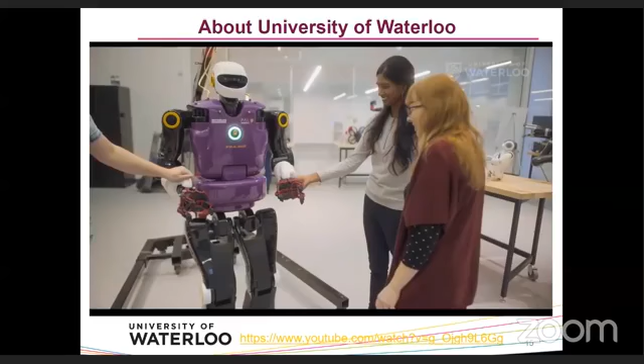She won the Nobel Prize just now. And he is Vice Chancellor of University of Waterloo.

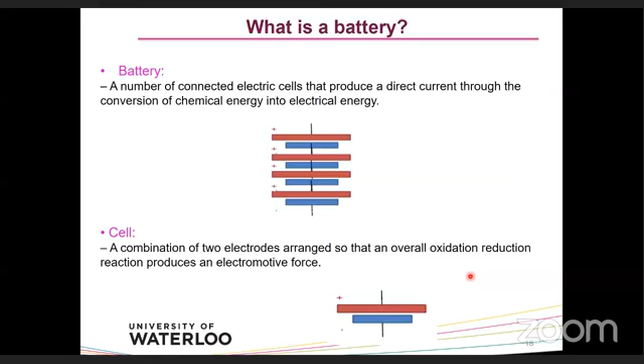Now, let me jump to my technical topic about the battery. What is a battery? We all know that a battery is actually a number of electrical cells connected either in series or in parallel. And the cell is a combination of 2 electrodes arranged so that an oxidation reduction reaction takes place, which produces electromotive force. Now, there are 3 types of battery: primary, secondary, and reserve.

So a primary battery is one which is not rechargeable. So once you are done, you have to throw that battery into the garbage. The best example is the Duracell or alkaline battery, zinc carbon, zinc air, or lithium metal. Another type of battery is known as the secondary cell or battery, which is the rechargeable battery. It means you can charge and discharge a number of times. And the best example is our 12-volt battery, with which you can start your car. Then the lithium-ion, nickel cadmium, and nickel metal hydride batteries.

Now, cell, module, and pack. So cell is the smallest element in the pack, which you can see over here, and the voltage range is between 1 to 6 volt. Module is something like this one, where a number of these single cells are connected either in series or in parallel. And pack, you can see over here, a number of modules, let's say 1, 2, 3, 4, are connected in series or in parallel, depending on your voltage and current requirement.

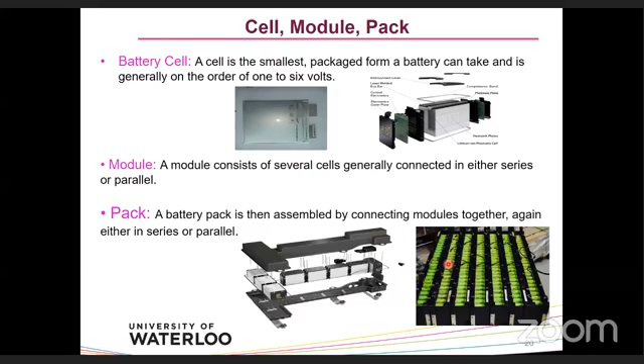And this is the Tesla battery pack, which uses the cylindrical battery, like the Tesla Model 3 and Model X also.

Common units we all know are voltage, current, and capacity in amp hours, which is equivalent to the coulomb. Now the new terminology is SOC, known as the state of charge, the measure of charge remaining in a battery relative to its full or empty state. And DOD, known as the depth of discharge, is opposite to the SOC. So let's say your battery is 60% SOC, then you can say the DOD is 40%. Another example: SOC is how much petrol is there in the tank, and depth of discharge is how much petrol is removed from the tank.

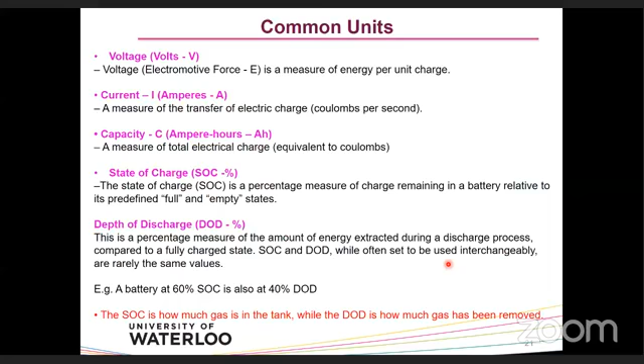In continuation to that, C rate and E rate. The charge and discharge current is measured in the C rate. So if you look at 1C, and your capacity is 100 amp hour, you can say the 100 ampere constant current discharge in 1 hour is known as the 1C rate. Opposite to C rate, it is known as the E rate. Power, we know, is V into I; watt-hour per liter is energy density, watt-hour per kg is specific energy, then specific power and power density.

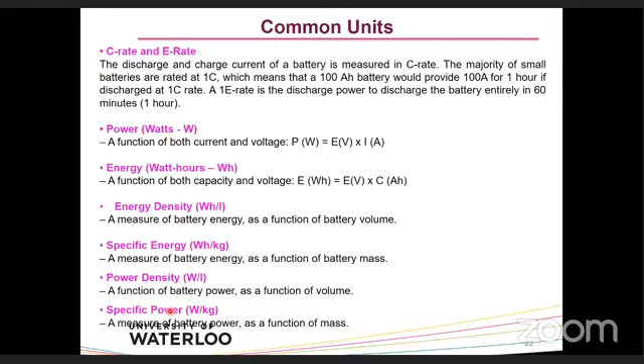State of health is the new term; it is the measure of battery condition compared to its initial or ideal state, and it is the measure between beginning of life and end of life as a percentage. Those who are in electrical must know about the OCV, known as the open circuit voltage, which is the voltage when there is no current passing through the circuit, and subsequently there is no chemical reaction occurring within the battery.

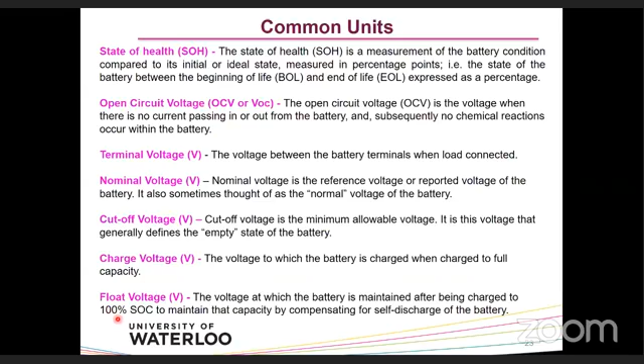Now, terminal voltage is the voltage measured between the positive and negative electrodes of the battery when the load is connected. Nominal voltage is the reported voltage, reference voltage, or manufacturer supplied voltage, and the cutoff voltage is the minimum voltage which defines the empty state of the battery. Charge voltage is the voltage at which the battery is fully charged, and float voltage is the voltage at which the battery is maintained after reaching 100% state of charge. So this is the end of the terminology part, and now the lithium-ion battery.

Then, types of batteries: as we all know, coin batteries are used for wristwatches and small devices. Cylindrical batteries are used in electric vehicles, and prismatic as well as pouch batteries are also used in electric vehicles nowadays.

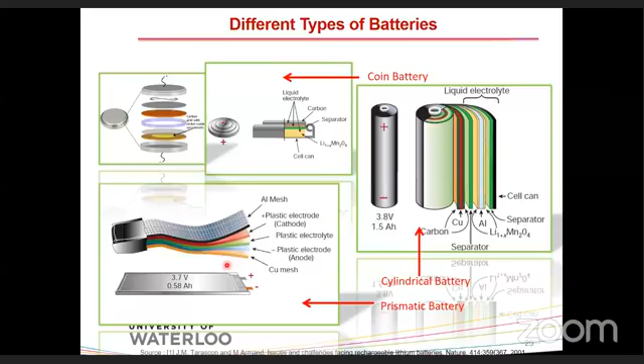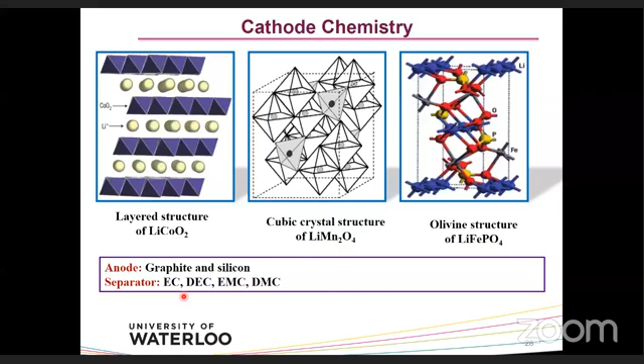The separator materials are ethylene carbonate, diethyl carbonate, ethyl methyl, and dimethyl carbonate. So after this, I would like to play a small video about the manufacturing process for the lithium-ion battery, which has the anode, cathode, and separator, and how they manufacture the battery with the LG Chem stuff.

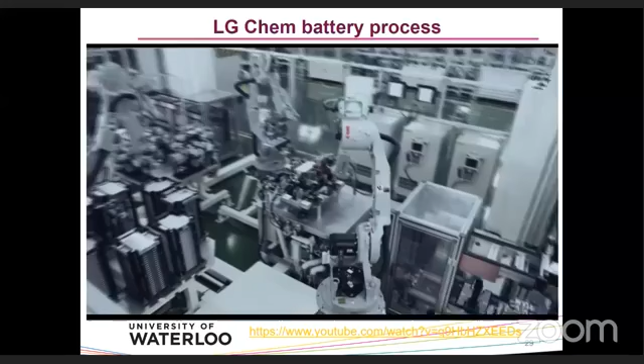So just for your kind information, the 5 dominant electric vehicle battery manufacturing companies are: one is LG, second one is Samsung, third one is Panasonic, fourth one is a very good Chinese company known as CATL, Contemporary Amperex Technology Limited, and then Bosch. So Bosch has recently launched so many batteries, and even Tesla batteries are also available in the market now.

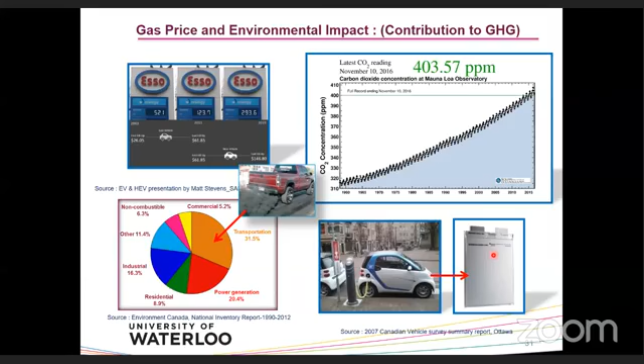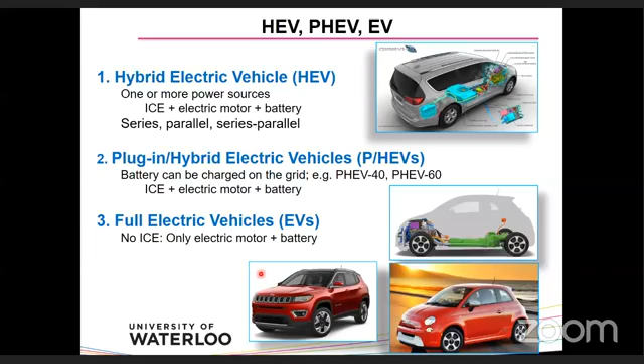And a full electric vehicle is one in which there is no engine. It works only with the battery and the electric motor. This is the Jeep Compass, and for your kind information, Jeep Compass is launching an electric version in 2023. So this is something about hybrid, plug-in hybrid, and electric vehicle.

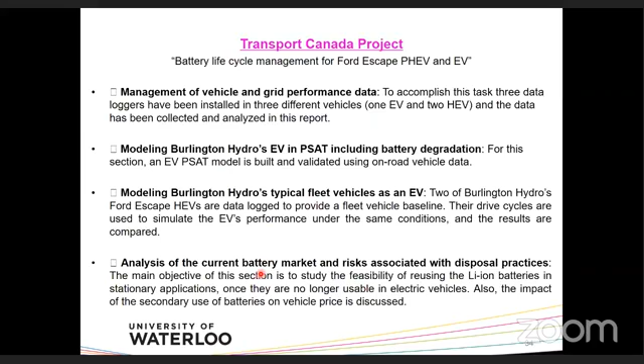Then the Transport Canada project. I don't want to go into all these paragraphs, but just to give you a small idea about the project. The title was Battery Life Cycle Management for plug-in hybrid and electric vehicle. And there were 4 tasks: one is data management, second was modeling, third model validation, and fourth the secondary use of battery.

To give you an idea about that project or that vehicle, it was the first Canadian electric vehicle, which you can see over here on the right hand side. So zero emission, pure electric vehicle. The company called REV, Rapid Electric Vehicle, that is in Vancouver, took out the engine from this Ford car and then put in the battery pack and the electric motor.

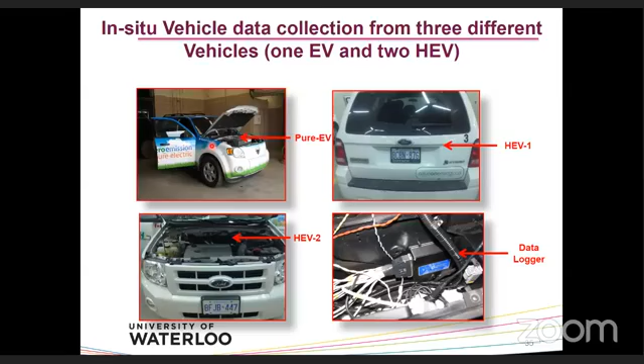So it's a pure EV, and the other 2 are hybrid electric vehicles, where you can see the engine plus battery pack. So I took 3 vehicles, and then you can see this data logger. This data logger was installed in this electric vehicle, and then we received the data.

But before going into that data logger, I would like to give a small idea about this pure electric vehicle, where you can see it has the UQM motor that is 125 kilowatt capacity. Then we changed the charging port also, the new charging port with level 2. Chargers are available with level 1, 2, and 3. And usually we use the level 2 charger, which takes around 4 hours to charge the vehicle.

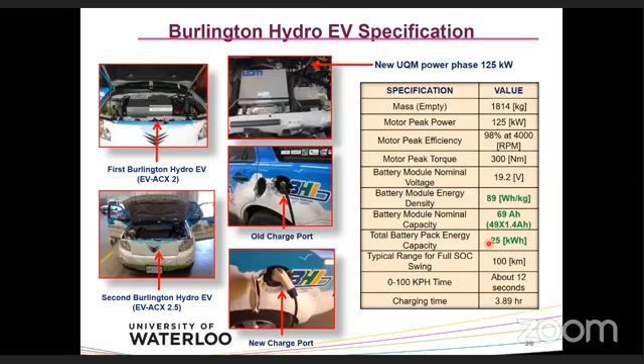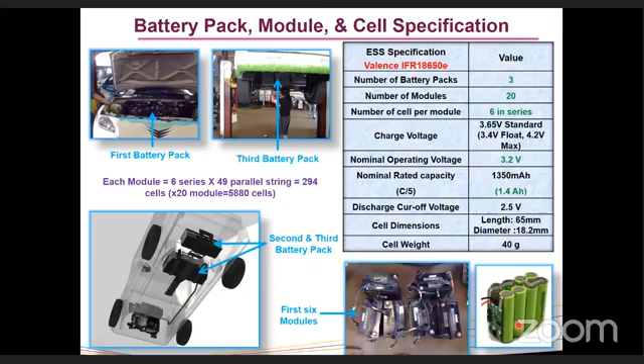Now, let me go to mathematics. Each module contains 6 series multiplied by 49 parallel, which gives around 294, multiplied by 20 modules. So all together, 3 battery packs have 20 modules, which gives around 5,800 cylindrical cells. The battery pack has 3 packs with number of modules 20. Nominal operating voltage is 3.2, and capacity of this cell is only 1.4 because it is a cylindrical cell. So this is about the electric vehicle.

And then this kind of ISAAC data logger was installed in this electric vehicle, which you can see over here below the passenger seat. And then the laptop was connected to collect the data during the driving. Here somewhere you can see the 12-volt shutdown wire, and then the GPS, the global positioning system, for the data collection during the driving and during the charging also.

Couple of important signals for electric vehicle modeling are battery voltage, current, all 20 module temperatures, state of charge, motor torque, motor speed, brake pedal position, and vehicle speed.

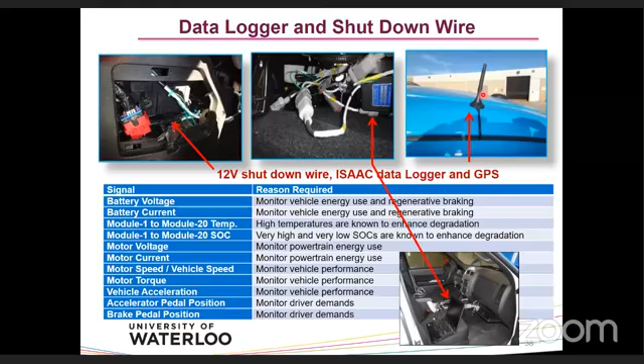After installing the data logger, I drove this electric vehicle from Toronto, meaning Greater Toronto, to Niagara Falls, and then back from Niagara Falls to Toronto on the highway called QEW, Queen Elizabeth Way. This is one of the busiest highways in Canada because it connects to Buffalo, meaning the US border.

When I started the trip, all 3 battery packs were fully charged with state of charge at 100%. When I ended my trip to Niagara Falls, the total trip distance was 106 kilometers, from Toronto to Niagara Falls. At the end of my trip, the SOC was 2%. Total energy consumption, since all 3 battery packs together have 25 kilowatt hours, was 23 kilowatt hours.

Trip cost was calculated at 11 cents per kilowatt hour, which is the electricity cost in Ontario province, Toronto, Canada. So to drive the 106 kilometers, the cost is only $2.60 — it takes only about $3 to reach Niagara Falls. If you go with a gasoline car, it takes almost $25 in gas. So I wanted to conclude that the electric vehicle is much more affordable in operation compared to gasoline vehicles.

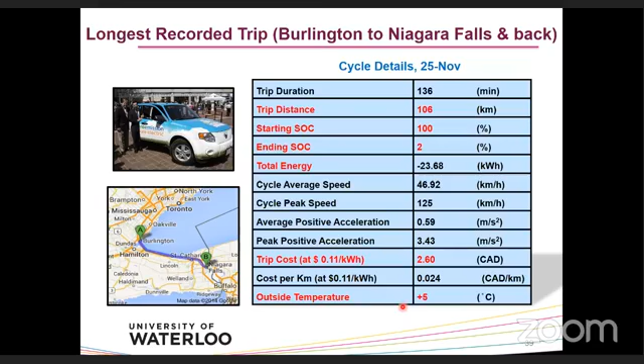Just for your information, when I drove the vehicle in November, the outside temperature in Canada was plus 5 degrees centigrade. This kind of energy and cost analysis was done for this vehicle in terms of total kilometers driven, time, driving energy, charging energy, energy path, and temperature, and monthly reports were generated, available on the Transport Canada website.

So this is about the drive cycle details. And after that...

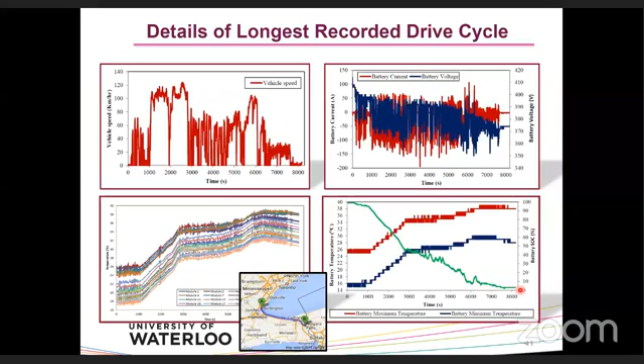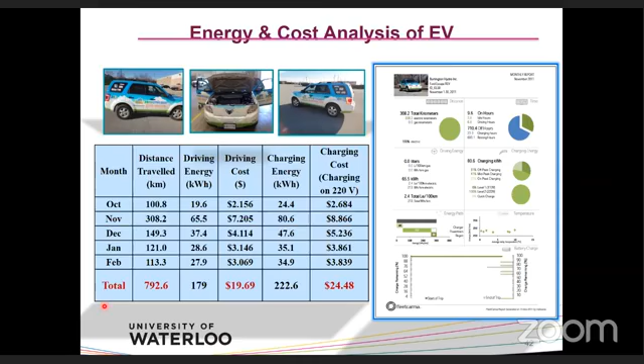The vehicle was driven on the same path between October and February, and it was found that it was driven for almost 800 kilometers over 5 months, with driving cost of only $20 to drive those 800 kilometers. A comparison was then done with two other hybrid electric vehicles, and it was found that this vehicle is much more affordable in operation compared to the other two fleet vehicles, which had the same mass, dimensions, and everything.

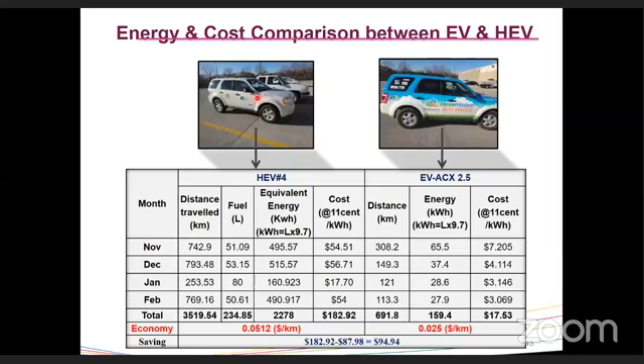This is the end of the second part. So the first part is the data logger installation, the second part is data management, and the third, very critical and important part, is model development.

A model for the electric car was developed using PSAT, the Powertrain System Analysis Toolkit software, whose latest version is known as Autonomie software. This electric vehicle was designed, and you can see the architecture where the important components are the battery, motor, torque coupling, differential, wheel, vehicle, DC-DC converter, and electrical accessories.

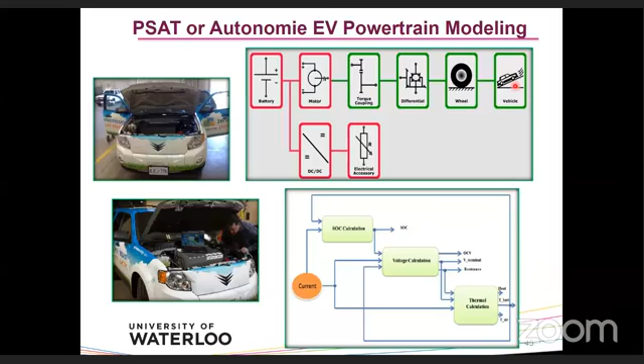Just for your information, when designing a vehicle, let's say in Baroda where we have flyovers, the maximum angle we take is around 7 to 8 degrees. But when I design a vehicle for the North American region, including Canada and America, we go up to 10 to 11 degrees — that is called the gradability.

After that, the first model was the electric model, but the second was a much more complicated model known as the PHEV model, because it has the starter, engine, clutch, gearbox, final drive, wheel, chassis (meaning the gradability), battery, motor, DC-DC converter, and some electrical accessories also.

So when you design or model any vehicle, you have to consider all these major components.

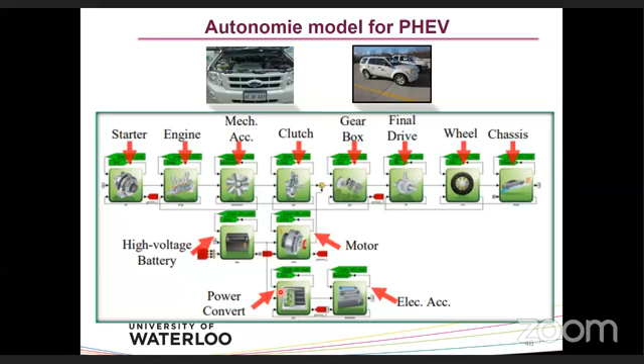This is a Simulink diagram, or MATLAB simulation, where you can see the driver. So the input is the drive cycle or the driver habit, and based on that, the powertrain or driveline or the controller will give a signal to the motor, and based on the motor power, the battery will deliver the required power to the motor. So all these three components, the motor, DC-DC converter, and the battery pack, are connected on the same driveline.

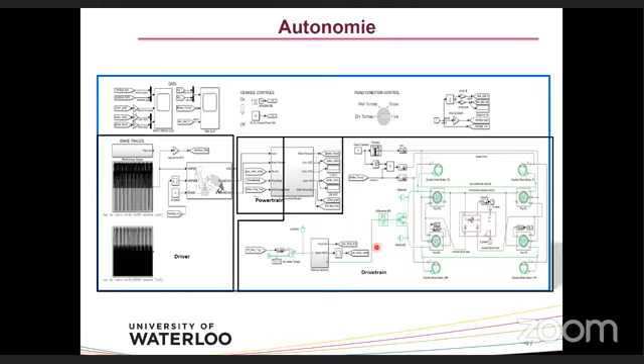I don't want to go into that much detail, but just to give you a small idea, to develop the model you need almost 300 to 350 parameters. Some of the important parameters are for the energy storage system, or battery: number of cells, number of packs, cell nominal voltage, minimum voltage, maximum voltage, mass of each battery, number of cells in series, number of cells in parallel connection, and all other important parameters for the battery.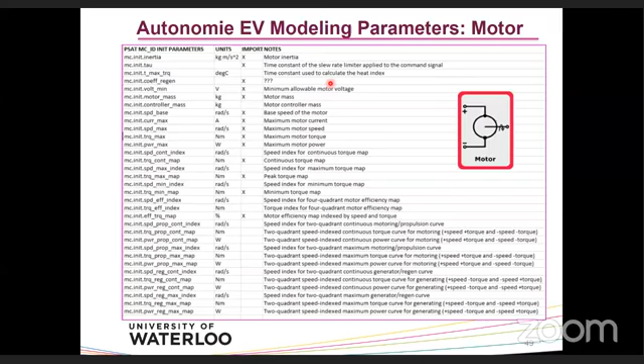In continuation of that, for PHEV we need the engine model, and for that we need the engine mass, fuel tank mass, and everything. For the gearbox you need the number of gears, like the number of teeth on the sun gear, ring gear, and all other parameters.

Again, torque converter, DC-DC converter, wheel, so number of wheels. When you design, I designed this vehicle for 4-wheel drive, but you can design or model for front wheel drive, rear wheel drive, all-wheel drive, or AWD also. Then you consider the vehicle mass, I considered the vehicle mass plus 5 passengers.

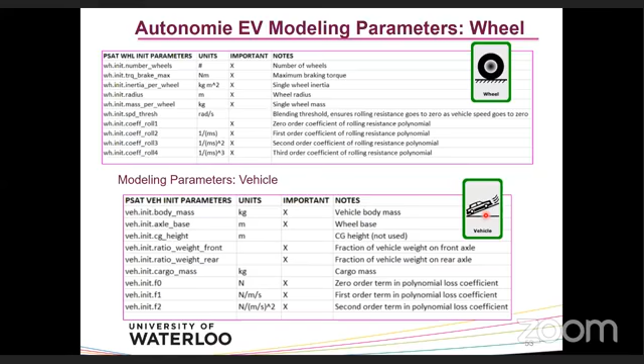So driver plus 4 passengers. Then you have to consider the gradability, CG height, cargo mass, and everything for this vehicle. Brake and final drive, and then finally the controller. So you can see how many parameters are required if you would like to develop the PHEV or EV model. This was the third part, known as the model development.

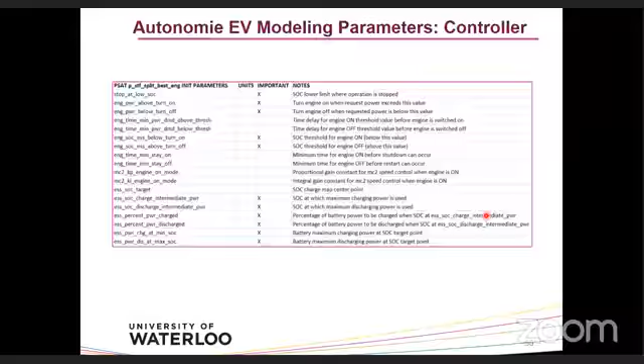I would like to highlight here that when I developed my initial model, I did not consider the regenerative braking system. Later on I refined my model, and my model captured the regenerative braking system also. So that is one of the important parts if you develop any model.

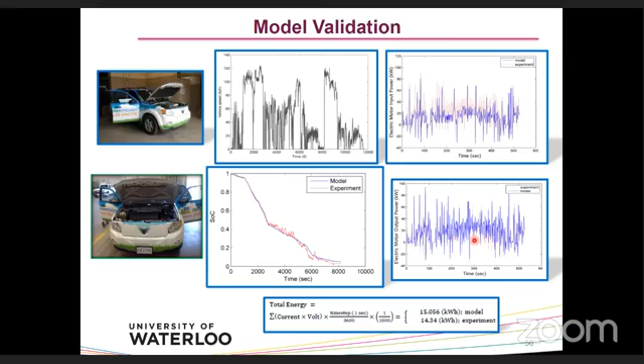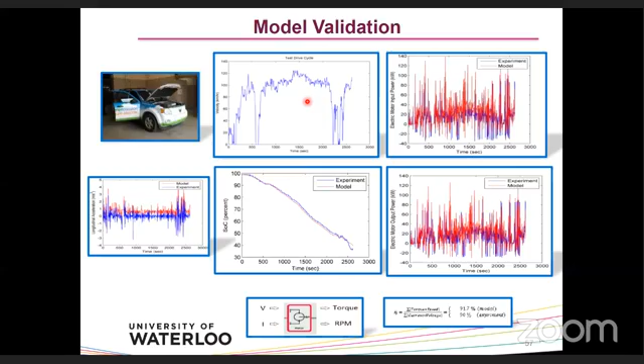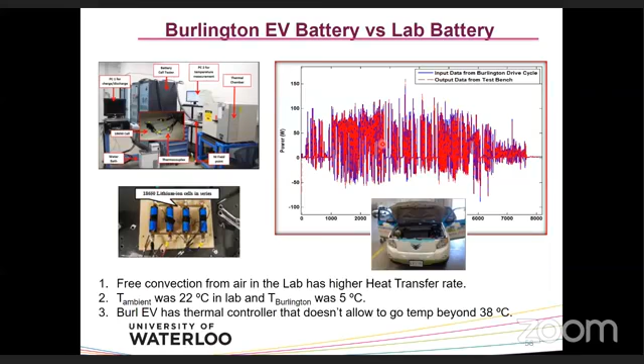Instead of doing those expensive experiments, like installing a data logger and driving the vehicle, we can take the drive cycle and feed it into the experimental setup, and measure the performance within the laboratory, which you can see here, the input data and output data from the test bench. So this is the model validation part.

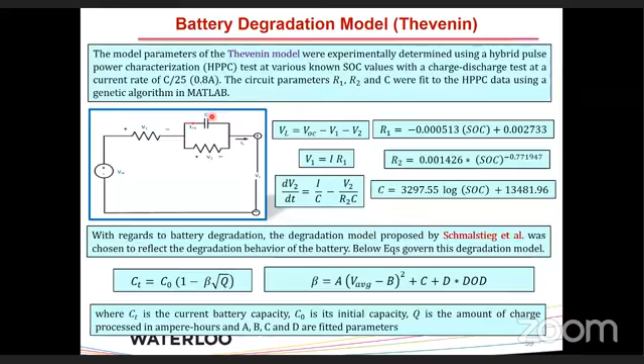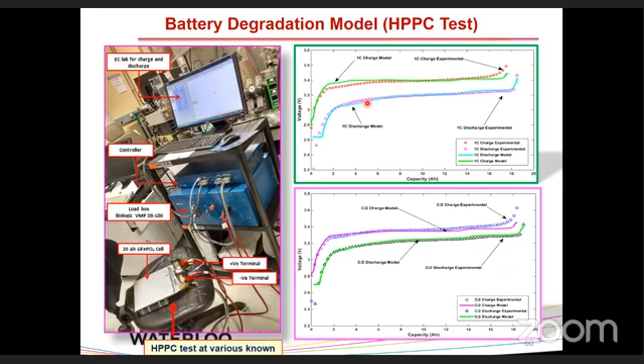My other paper, recently published, is on OCV, the open circuit voltage, versus state of charge at different states of health of the battery. So let's say you take a brand new battery, a 1-year-old battery, 2-year-old, 3-year-old, 4-year-old, and 5-year-old. I took 6 batteries and compared the OCV with the fresh battery, and then developed the model, which was published last week in the Journal of Energy Storage System.

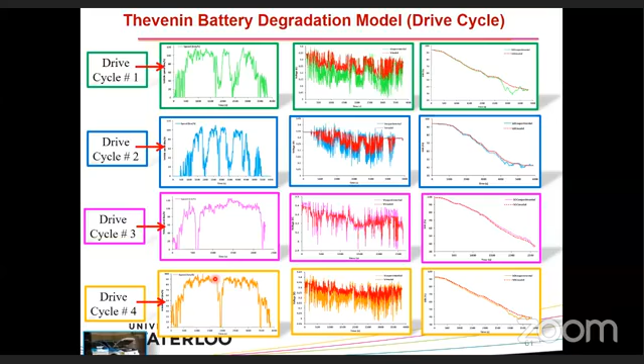So I think that's it from my side, and you will find my interesting papers which I published during my research work. During my master's, PhD, and postdoc, I published almost 30 journal papers, which you can also find on Google Scholar.

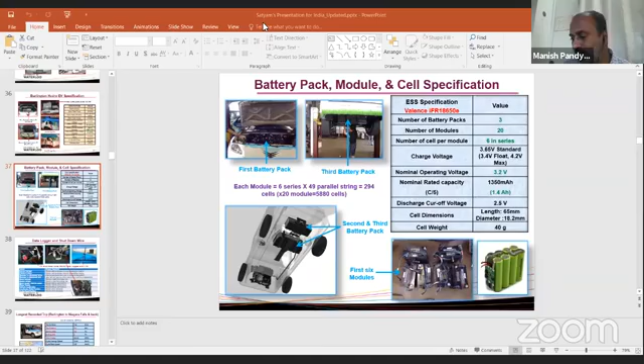Thank you very much for the very nice, informative topics. Actually, we have many questions in our mind during routine life: what about the electric vehicle and what about the batteries? So I think today many things about the battery and the electric vehicle have become clear. Thank you very much, sir, for the excellent information about batteries, hybrid and electric vehicles. Now we have some questions related to today's presentation, so one by one I'm asking you the questions.

Sure. There is one question from Professor Rital Gajar. The question is, how to get the state of charge and state of health for the battery? Okay, good. So, Professor Rital, this is a good question. If you want to measure the SOC inside the lab, then it is very simple: integration of current with respect to time. Integrating I dt will give you the capacity in amp hours, or you can say the state of charge. But if you would like to measure it for this particular vehicle, it was very tough for us to get that answer.

The company who designed this vehicle, known as the REV, Rapid Electric Vehicle, we asked a couple of times how they measure the SOC. Because of confidentiality reasons, they did not give that answer to us. But there is a sensor which measures the cell temperature and cell state of charge also, so based on that, you can measure the SOC.

Second question, SOH. SOH is a big phenomenon related to degradation. Degradation is another big research area: first, degradation due to cycling, the number of charge-discharge cycles. Second, degradation due to high temperature, say in India, where we have almost 45 degrees centigrade. And degradation due to low temperature, the best example is Alberta in Canada, where we have minus 45 degrees centigrade. So degradation occurs because of storage, high temperature, low temperature, and the number of charge-discharge cycles.

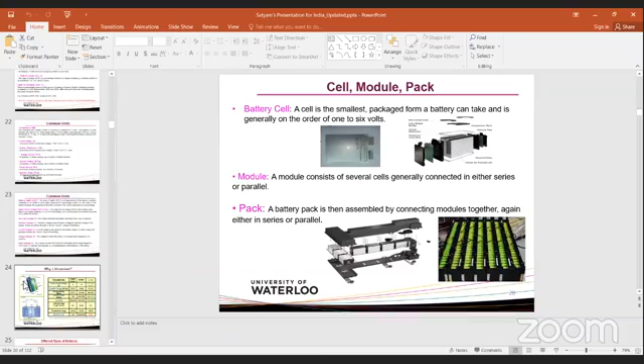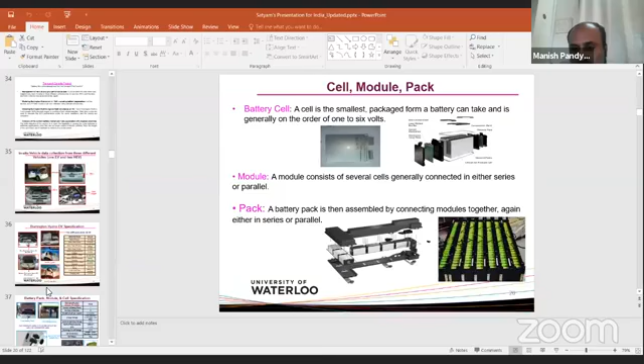Then okay, so the next question is, I think there is a question from Professor DVS. The question is: if the current for charging the battery of the vehicle is more than the rated value, then how can we control the current, or how does it affect the battery? Okay, so this is something related to the charging.

Now, Mr. DVS Kumar, people are working on DCFC, called DC fast charging. And just for your kind information, I cannot disclose that R&D information, because I'm working in an R&D center, so I'm not allowed to share any confidential information. But the general idea is, if you double the current... right now, if you look at all these vehicles, those are designed with the 400 volt system. If you take the example of the Tesla Model 3, which is 370 volts,

the max voltage is up to 400. But now, let's say an electric train, or electric construction equipment, or an electric truck, those are designed with 800 volts. And now we are jumping into 800 volt, where the voltage is double but the current is half. And people are working on the control side in that area for the charging of the battery.

Okay, so basically if the current is increased, there will be an effect on the battery life also. Yes, sir? Yeah. And even for the charging port, with the 800 volt system or with the 400, we need the cooling system also, from the wall to the electric vehicle charger, or let's say from the charger to the vehicle.